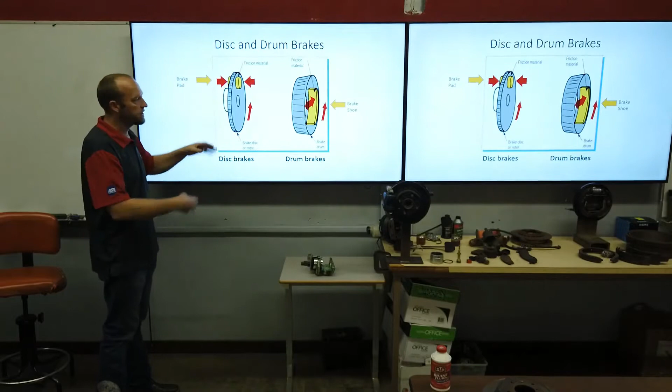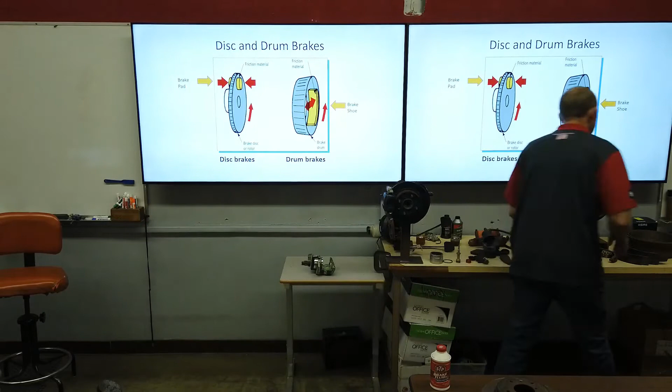With the disc brake, we have a brake rotor or brake disc, and the friction linings are called brake pads. With a drum brake assembly, we have a brake drum, and the friction lining is called a shoe. So here we have a brake drum and a shoe, and here a brake rotor or disc and a pad. They look completely different from each other.

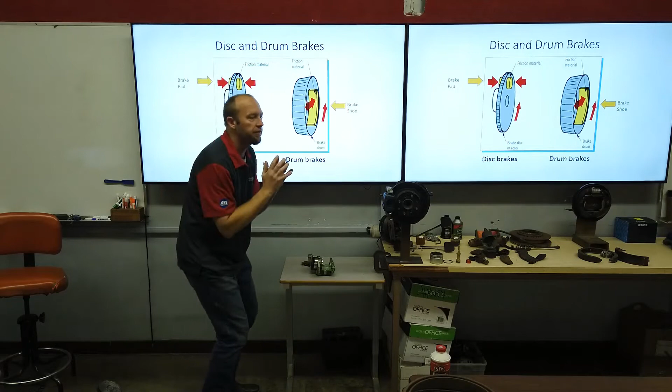I should say real quick, clamping force on a disc brake system: friction linings come from the outside in and clamp down to slow this brake disc, which stops the wheel. With a brake drum, they push from the inside out to make contact with the drum and slow the wheel down and ultimately stop the car.

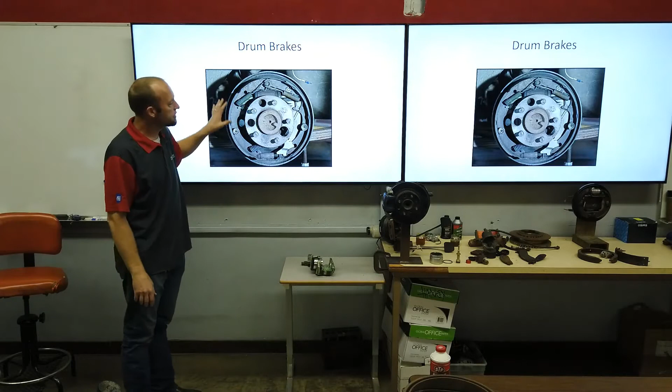This is a typical drum brake here where you see the friction linings of your brake shoes. A drum would be over the top of that, so you can't see any of this. So I want to look at a video here.

The video we're going to look at is a drum brake video, and I'll say about this video that I don't watch a lot of videos and I don't really endorse a bunch of videos. I'm realizing the irony of this as I'm shooting a video. In class, I typically don't play a lot of videos. I want to explain it the way I want you guys to understand it, so I don't usually grab a lot of videos from the internet. A lot of the reason is that there's a lot of misinformation, and there is even in this video, so I'll make a correction to that.

The main reason why I'll show this video is I'm trying to show something dynamic that you usually don't get to see. I want to make sure you understand how this would work on a car, because we don't usually get to see what happens inside the drum since it's not visible. So with this drum brake, and with disc brakes as well, I'm going to show a video here and I want you guys to see how it would operate and function.

One of the errors they make in this video is they call it a self-actuator. What they're referring to is a little self-adjuster that, as the brake shoe linings wear out, will self-adjust. Self-actuating is a different property of drum brakes. Self-actuating is the idea that as these brake shoes apply, the harder the drum tries to rotate, the more biting force those shoes have—they self-actuate in that regard. A self-adjuster is a completely different process: it adjusts as linings wear to keep proper clearance between the shoe and the drum.

So don't confuse those terms, but we'll go ahead and play this video. What I want you to pay particular attention to is the way the hydraulic fluid comes out and the pistons expand, and how one shoe will bite in, shift over, and apply the other—that's called servo action. We go from the shoes not applied to a nice perfect circle, and as they apply they egg-shape and bind up. That, combined with the self-energizing property and servo action where one shoe helps apply the other, is why a drum brake system generates a ton of friction without a lot of application force.

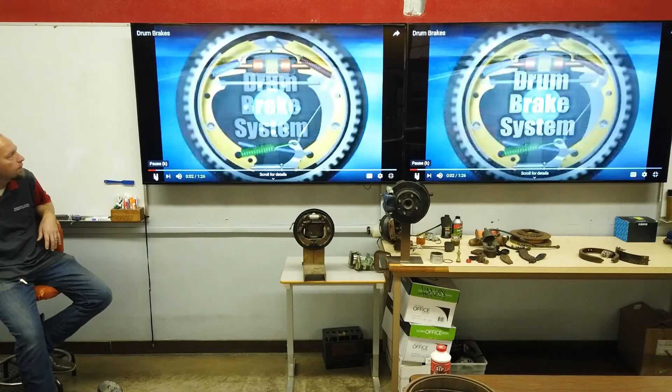In drum brakes, the wheel cylinder, with the aid of hydraulic pressure, forces brake shoes out against the drum to create friction. So pay special attention to the fact that as the wheel cylinder expands and applies, we get this shoe that will apply and bite in, and then it's going to kick over and apply this other shoe here. So that's some of the application. I'm going to let it play out after this, but I'll stop it here and make a couple of points.

This drum assembly is a servo style of drum. One of the ways that you'll know is that there's no anchor pin like we have on this one down below. There's an anchor down below that does not let this shoe apply the other. So this is a more modern drum brake assembly called non-servo. This is servo, what's displayed up here. Both of these drum brake systems have self-energizing properties, but this one has servo action and this one does not.

Because one shoe helps apply the other in this case, they generate a ton of friction and it can be uncontrollable, where you get a higher tendency of different amounts of friction from a different wheel, and you can have a car that starts to pull. If this one makes more friction over here than this one, then it will pull towards the side that makes more friction. So you tend to have pulling problems with systems like this because they just go to town and make friction. Well, if they don't make the same amount of friction, then you can have a car that starts to pull. They got away from using this style probably by the 80s, mid to late 80s.

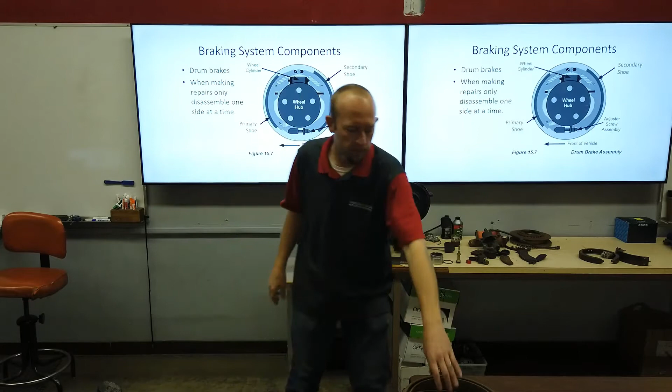One of the common problems with the drum brake system is that although it does have a self-adjuster, they usually don't self-adjust. So a really common issue with drum brakes is they come out of adjustment. Because it's not taught very much anymore, what you'll see a lot of techs do to adjust drum brakes is throw the drum up on the car, spin it, and bang on it to try to center the shoes. They spin it and bang on it, then pull it off and see how much it drags.

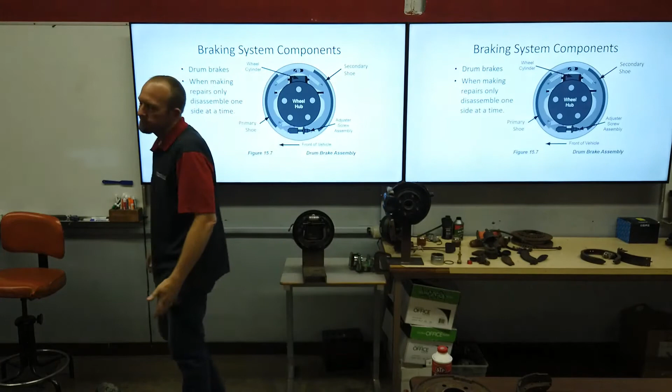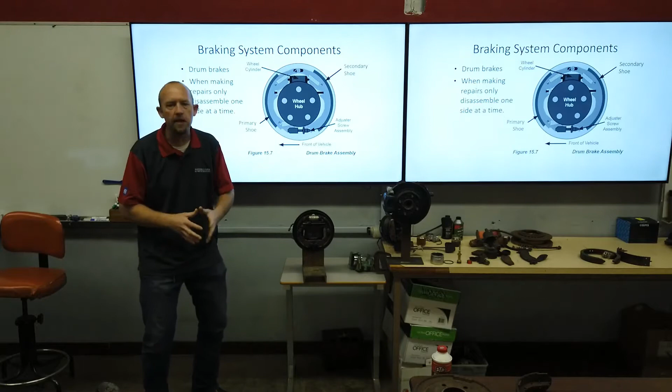If you deal with older techs in the industry, they know how to adjust drum brakes properly. Very few people take the time to do it. But where it is still done often is in medium and heavy duty applications, like semi truck and trailer. Some of you may have experience driving trucks like that and having to check slack adjusters and things.

But basically, the right way to do it is you end up adjusting the shoes all the way out until they make contact with the drum. Then you back them off the same amount. Now, that may mean that I go and click this adjuster out.

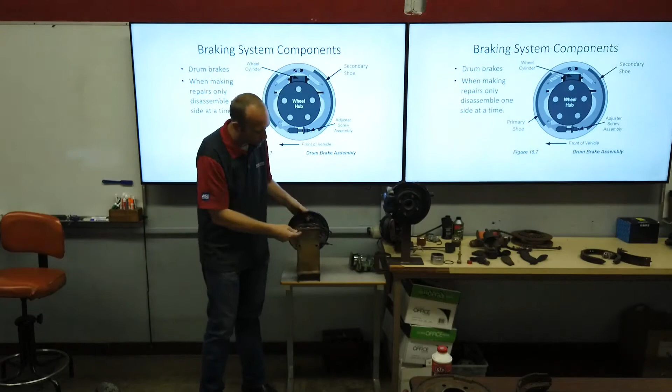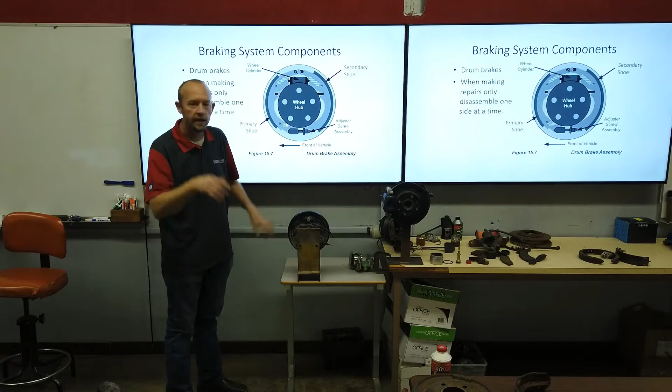There's an access hole through the back on the backing plate that I use with a brake spoon, which is kind of like a bent screwdriver or a pry bar, but slender. You can come back through and grab the little adjusting wheel on here. This is a little wheel right here that'll have a little cutout behind it. I can go and ratchet it, click, click, click, click, until it comes up and makes full contact and you can't turn the wheel anymore.

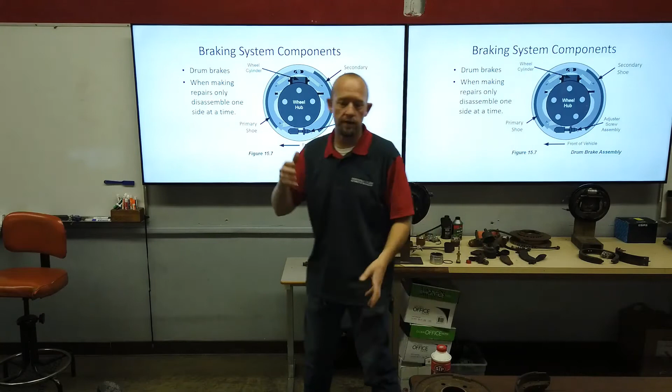Then you would come in and back it off the same amount. Maybe you adjust it all the way up and back it off 5 clicks. You do that for every single wheel, and now you have brakes that are adjusted identically.

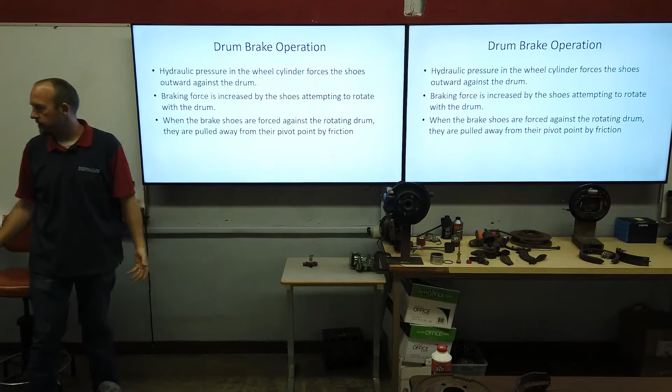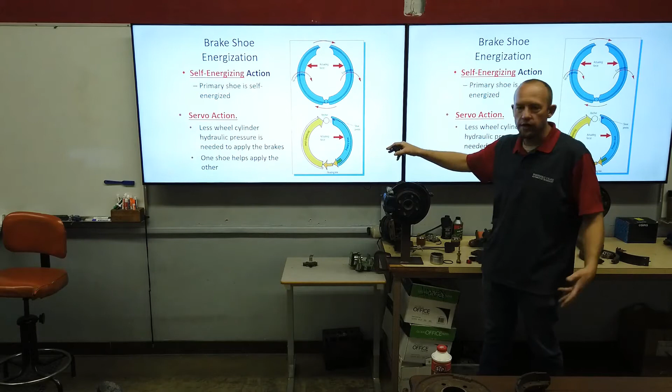Those are some properties we have, and I've addressed the non-servo style where the anchor is down at the bottom and they usually move the self-adjuster up top. So our self-adjusters often don't work.

Brakes come out of adjustment. When they come out of adjustment, because there's more clearance between the shoe and the drum, it takes more pedal travel before the shoe finally makes full contact and we can start building pressure. A common complaint from that would be a low pedal.

When a customer comes in complaining of a low brake pedal, the first thing I'll do is check the brake adjustment if it's got drum brakes, because 90% of the time, if you fix the adjustment, the pedal comes back up to the top. I've never had to mess with the emergency brake cable when people's e-brakes don't work - it's usually just a drum brake adjustment issue.

One tip-off that the brakes are out of adjustment is if you hit the emergency brake and it just zips with nothing happening - it doesn't apply the brakes. You can put it in gear and it just takes off right away, even with the brakes applied.

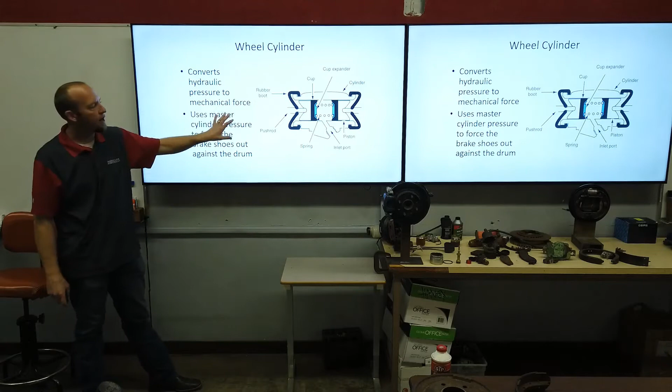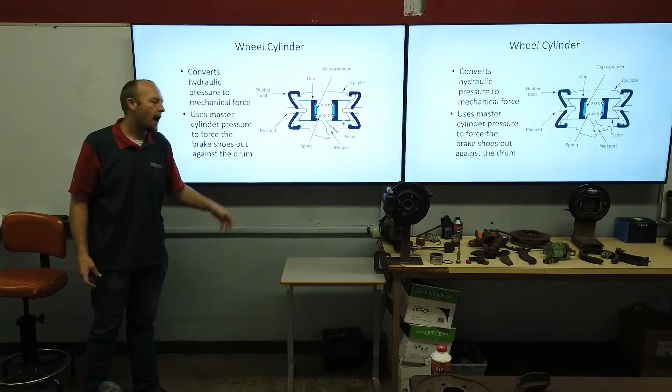Our wheel cylinder is going to be a hydraulic component for our drum brake assembly. The emergency brake - I'll talk about it - doesn't have to do with this, this is our hydraulic component.

I'm going to switch back to this slide. This over here is our emergency brake lever. It would be cable operated. A lot of manufacturers nowadays, for an emergency brake, you'll notice...

If they went to 4-wheel disc brakes, on the inside of this brake rotor - we call this a hat rotor because it just fits over the top of everything like a hat - there's a little drum area on the inside. A lot of manufacturers have started making an emergency brake shoe that fits inside that little area on their 4-wheel disc brakes. That's how they keep 4-wheel disc brakes while having an emergency brake that works a lot better than a typical disc brake emergency brake.

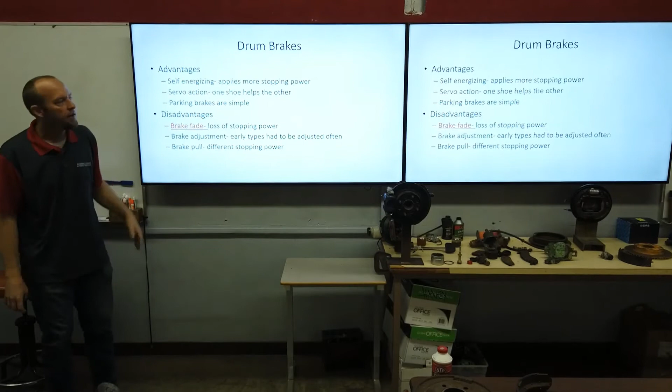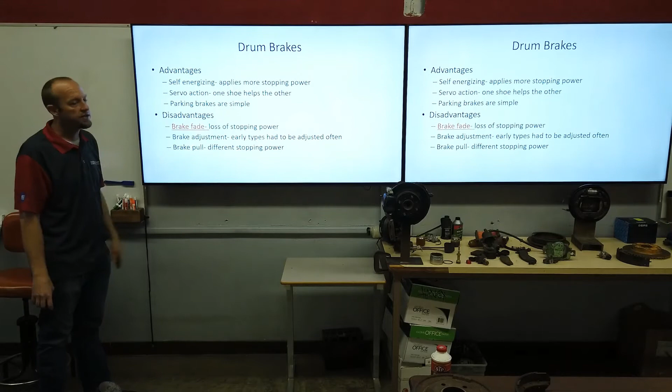There are advantages and disadvantages to everything. For a drum brake, the advantages are the self-energizing property and the servo action - park brakes are simple and work really well. The disadvantages are they're much more susceptible to brake fade; that big drum over everything traps heat like an oven. They require regular brake adjustment, and because their brakes come out of adjustment relatively easily, they're more susceptible to brake pull, where uneven amounts of friction are applied to each wheel.

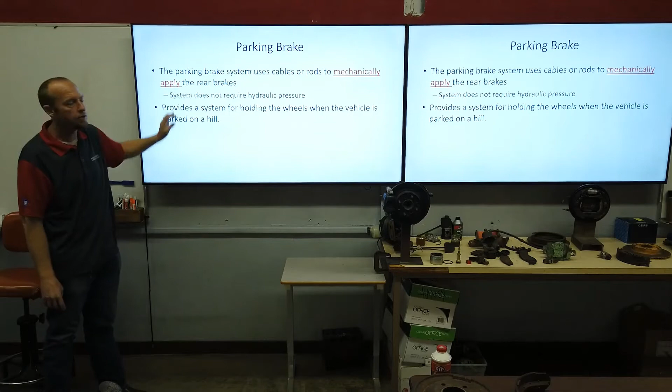The parking brake system has to be mechanical. The system does not typically require hydraulic pressure, so it has to be a separate system from the foundation or service brake. On cars, it's usually mechanical and provides a way of holding the wheels when in park.

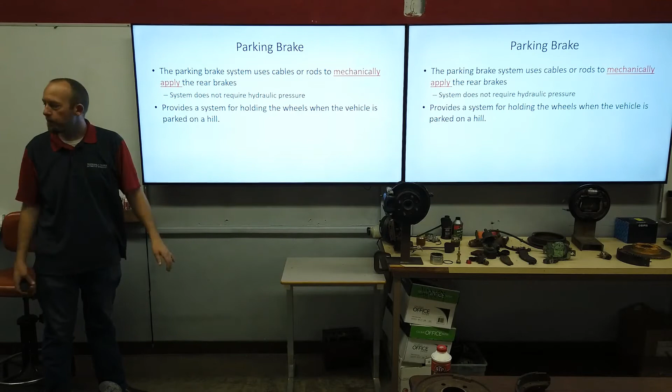So then we get to our disc brake system. A disc brake system will have our brake caliper. There's a variety of different ways - floating, sliding, and fixed calipers - which we'll talk about. And then you have your brake rotor or brake disc.

So the caliper, this way, the system has a rotor sandwiched between two friction linings, called pads. Then you've got a little square cut seal, a piston seal, which keeps fluid in, and also retracts the piston after brake application.

The line comes in, and the bleeder should always be at the top. If somebody installs a caliper upside down, the bleeder would be on the bottom, and they would not be able to get all the air out of their brakes.

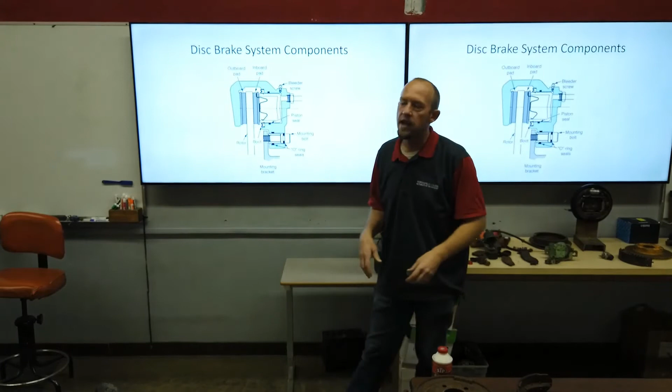I've had customers come in who knew enough to put brake calipers on their car, but installed the right caliper on the left side and the left one on the right side, so the bleeders were upside down and they couldn't get the air out of the system.

I saw it as soon as they drove up in the driveway and mentioned what was going on. I looked at it and thought, well, they're going to pay me for what I know. Because if I had told that guy right away, 'hey, you put your calipers on upside down, that's why you can't get the air out,' and if he was capable enough to put the calipers on, he could just switch them back and forth himself.

So I'm going to wait till he leaves, make my diagnosis, write it up, call them, and a lot of times once you have it, they'll pay you to fix it too. But it's not to my advantage to just tell them while it's in the driveway and let my money and time spent just drive out of the driveway.

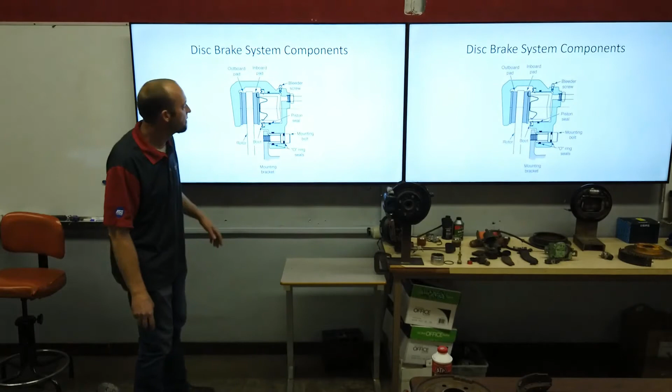So this is a floating pin, which is the fixture that mounts that caliper to your knuckle.

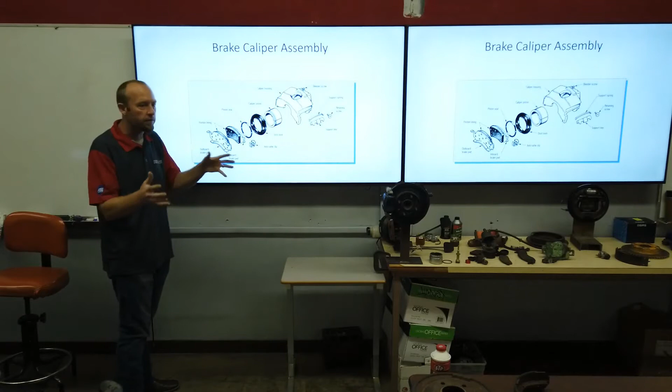This is an exploded view of a caliper, what we'd call an exploded view diagram. So here's the friction material, the pads. They often have some hardware to keep the pads from sliding around inside the caliper and making noise. There's our little square cut seal, a dust seal, the piston, and then the body of the caliper with the bleeder.

Got a couple of videos for you here, same as before. On this one, the biggest thing I want you to see is that this is a sliding caliper.

So on a floating caliper, that's what takes place: the pistons come out and apply the pad on one side, then the whole body of the caliper rakes over and pulls the other pad into application. The pistons move this way, and the caliper body slides on a pin and moves the other way. That's how that one works.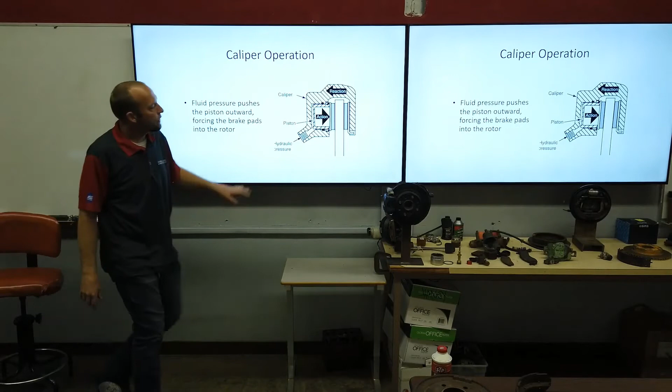So this is our floating caliper that would float on some guide pins. As the piston comes out and applies this pad, the body would rock over and pull this pad into contact to generate our friction to stop this vehicle. The square cut seal we're seeing would deform.

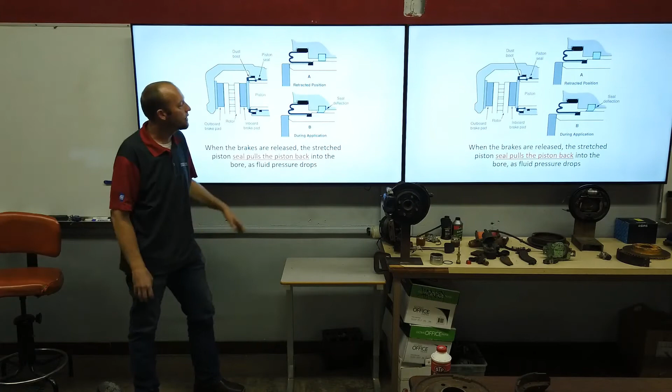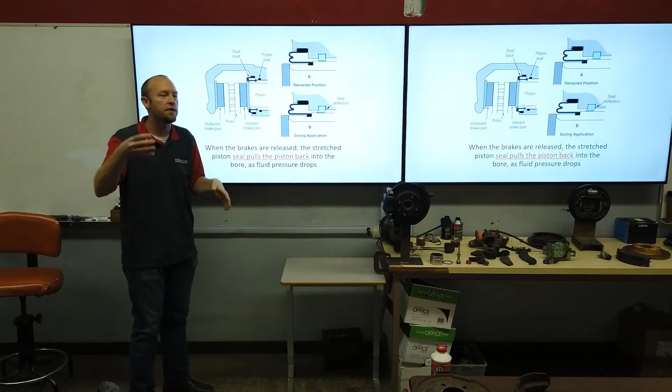So as the piston slides out to make contact and push the pad into contact with the rotor, then when brake pressure is released, it pulls the piston back. These become self-adjusting and self-cleaning because any dust that's generated gets blown away, where with a drum system it's trapped. They also self-adjust because as the friction lining wears off, the piston just slips out a little further past the seal and falls into a new range of deforming and retracting.

So pretty simple system here, doesn't require a ton of maintenance. Some advantages of disc brake systems would be that they're pretty much fade resistant because they're exposed to so much open air that they can get rid of heat quickly. So they're fade resistant, self-cooling, self-adjusting, and self-cleaning because the dust just blows away.

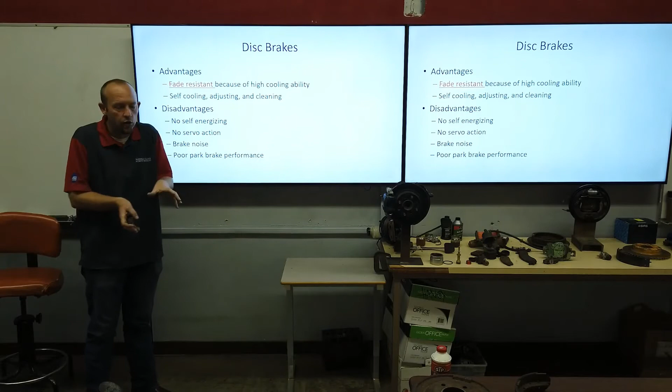Disadvantages: it requires a ton of application pressure, which is why the pistons are so much larger than those of drum brake systems. No servo action, no self-energizing. Because they generate so much friction, they generate a ton of heat. They usually become quite susceptible to brake squeaks, and have poor park brake performance, which is why a lot of them have moved to a system like I was showing you earlier, where they make a little mini drum inside the head of that rotor.

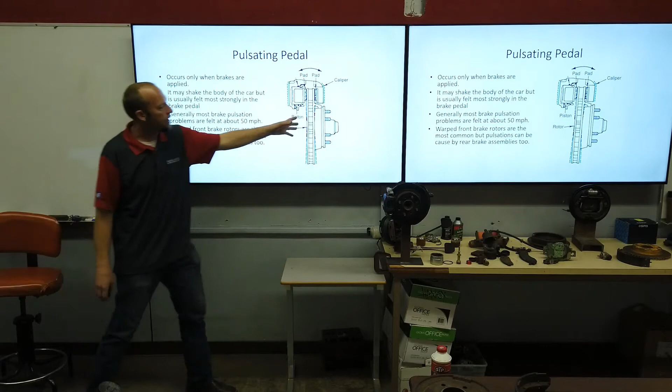So, brake system problems that are common to see: pulsating pedal, we've talked about warpage, where the rotor is not true. And because of hydraulics being what they are, if this rotor doesn't rotate true and it beats the piston back...

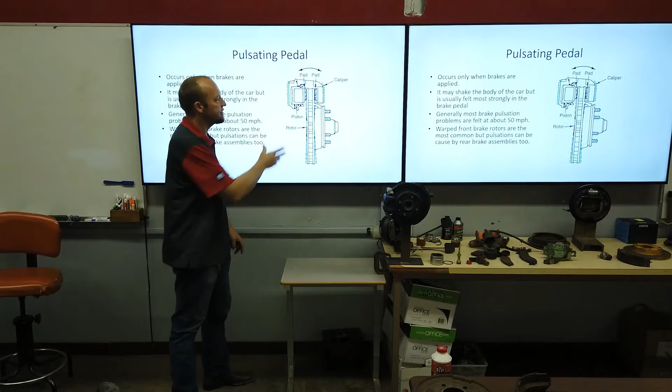...then as it pushes the piston back, the piston pushes the fluid back, which pushes the pedal up inside the car. And as it chases this thickness variation, you get a pedal that pulsates. The faster you go, the faster that pulsation is.

So typically what I would do to diagnose pedal pulsation is get a car up to about 50 miles per hour, and then lightly press the brake. If I feel the pedal come back and hit me in the foot, then I can tell that the brake rotors are warped.

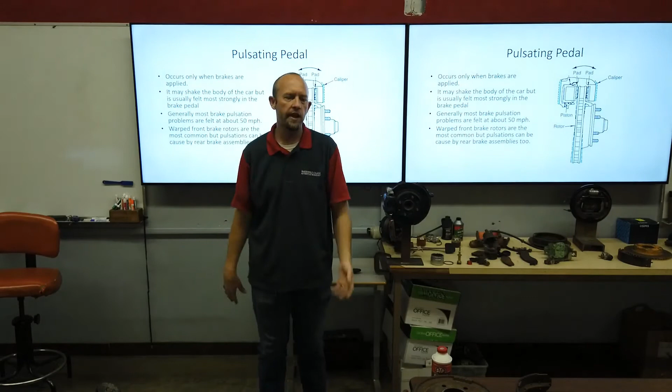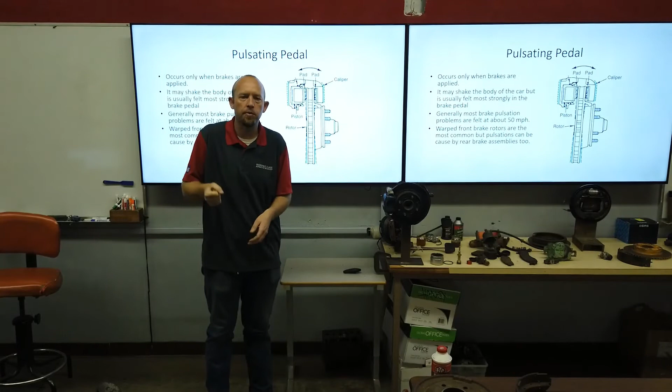The other way you can isolate rear from front is because the emergency brake is typically on the rear axle. If you use the emergency brake to apply the brakes on a drum brake system, you can feel it in the emergency brake and apply the drums. That's also very useful for noises.

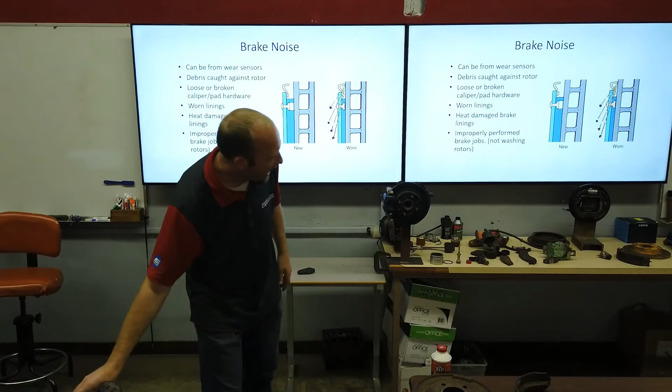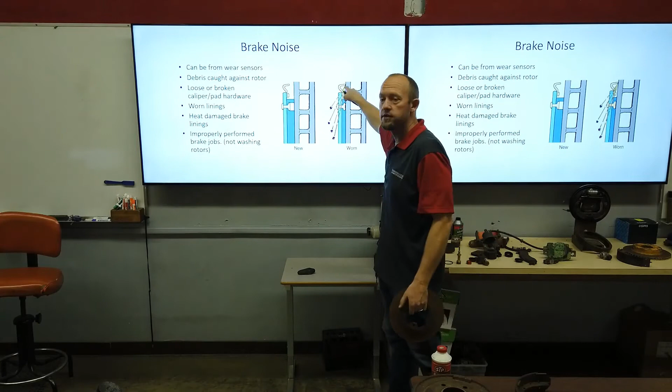So when you hear brake noises, a lot of brake pads will have these little tattletales or warning indicators on these pads. You can see it on this one that would have a warning indicator there. And if people ignore that long enough, instead of just the squeak, usually they'll squeak a little more when the brakes are not applied, but it will sit there and drag, and then when you apply the brakes, it'll go away momentarily.

But if they ignore that squeaking noise, then it turns into this, which is what grinding money sounds like, as I was telling you before. That is not like nails on a chalkboard. That is money. So the price just goes up.

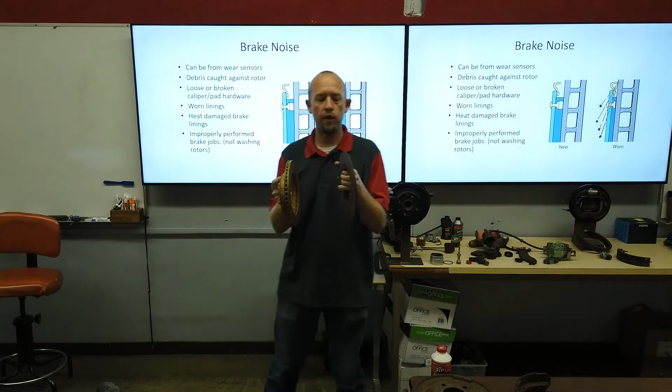By the way, this rotor used to look like this one. You can see how thin that one is. You can see the little slots and ribs inside this one. That whole side of this rotor is gone.

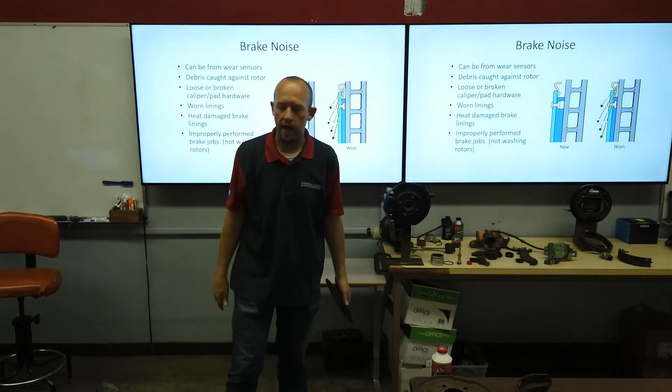And so that person drove it until the pistons popped out of their calipers, which some people will do. And if they do that, do not let them drive that car out of your shop. They can tow it. They can tow it themselves. They can call a tow truck. They can tow it.

They cannot drive it. That is a huge liability, and they may go right down the street and kill somebody else's family member or something. Do not let them drive it out. I've had people say, well, you can't stop me from taking my car, I'll call the police. I'm like, go ahead. If they'll pull you over and give you a fix-it ticket for a taillight burned out, what do you think they'll do if you can't stop your car? So don't feel like a jerk, it's doing the right thing. Protect the people in your community.

That's the right thing to do, in my opinion. I'm not making them pay me to fix it. I'm just telling them you can't drive a car that you can't stop.

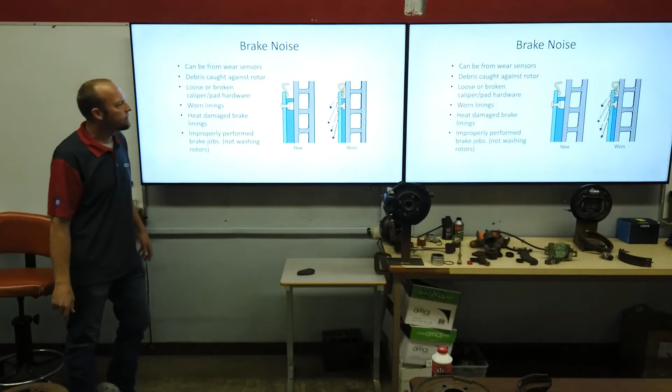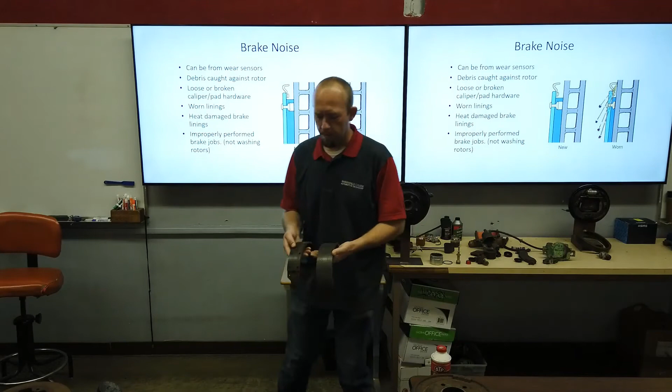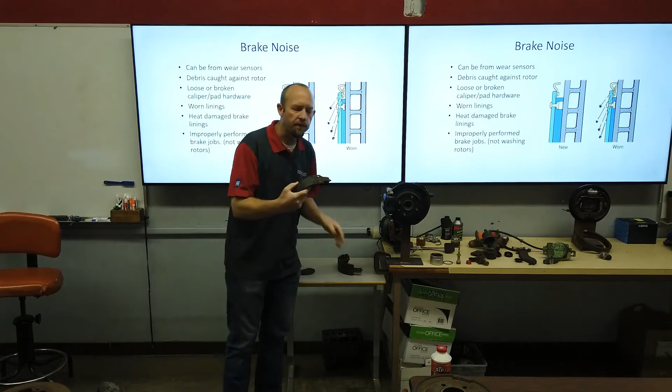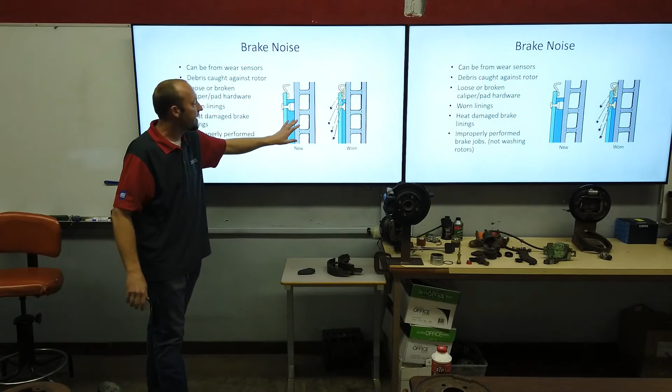One of the other things to be aware of: you can see this is a riveted pad. I've got a couple of brake shoes that show this well. This one is a bonded one, you can see there's no rivets, it's glued on. This one is riveted. I want you to see the linings on this are about the same, but the one with rivets will touch before we have all the lining worn out. On one that's glued on, it will go all the way to the backing plate, or all the way to the frame of the shoe - the metal part. Where on this one, before it even wears all the thickness of lining off, it's going to touch a rivet. So be careful - riveted pads may look like they have more material than what they actually do. We only have as much friction lining as to the point that we can touch the rivet.

Some of the squeaks that we get are from somebody doing a brake job and not washing the rotors like we talked about. Other times you take them apart and you see that.

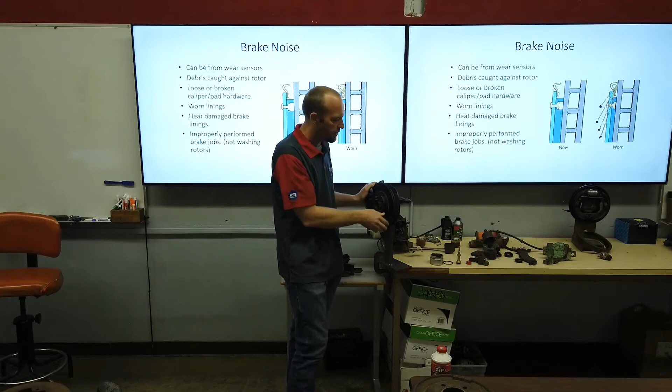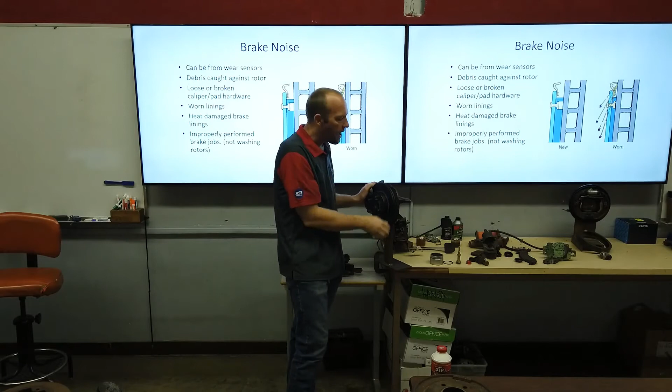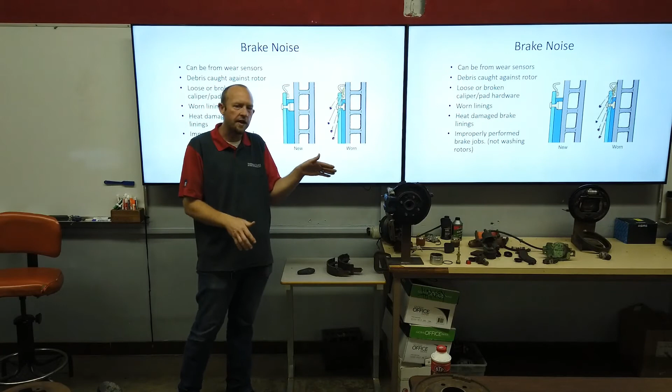Other times, one of the things you got to watch out for as well - you can hear this one. What's taking place on the back side of this, if I turn it a bit where you can see, there's a backing plate here that keeps rocks from getting in, or water from splashing directly on this. A really common thing that happens that people aren't paying attention to is this thin sheet metal backing plate will get bent to where it touches the rotor. Make sure you always look down, make sure it's clearanced out, and if it is touching, just bend it back, bend it out of the way so it can't touch anymore. Sometimes your backing plate will start to rub up against the rotor and it'll squeak - really common entry-level tech mistake. So make sure on the brake jobs you do that you look down the side of that rotor and make sure the backing plate, or that splash shield, dust shield, is not touching the face of that rotor. You'll end up with a squeak.

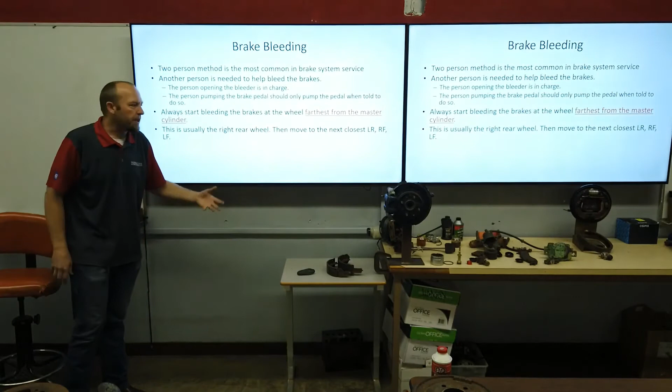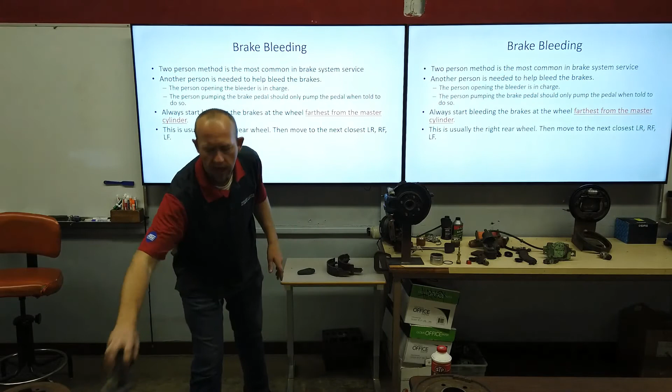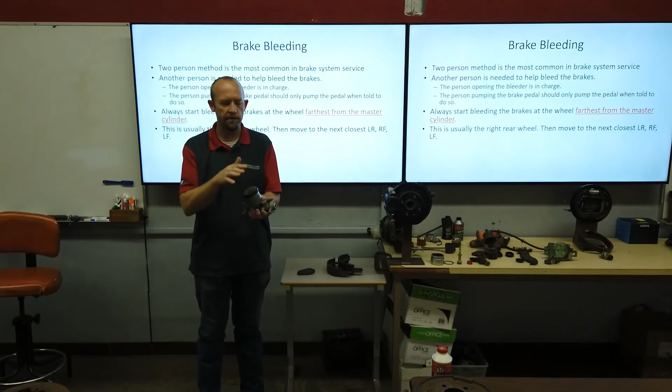Brake bleeding - we talked about our two-person method. There's also power brake bleeders where you hook air up to it, and there's a special adapter for each master cylinder. A lot of dealers will have those. In some independent shops we have one, but because it requires a special adapter for every master cylinder cap, and all the different caps they have, you're typically limited on what you can use it on, and it can make a big mess if you get it installed on one that does leak. And if you spray brake fluid and get it on somebody's paint, it'll orange peel their paint like bam. So make sure you're super careful with brake fluid - we don't drip it on people's paint and stuff like that. But brake bleeders are super nice, a one-person method - you hook up a line with a special cap adapter, then you just go to each wheel and crack them, and you can bleed brakes like that with a system like that.

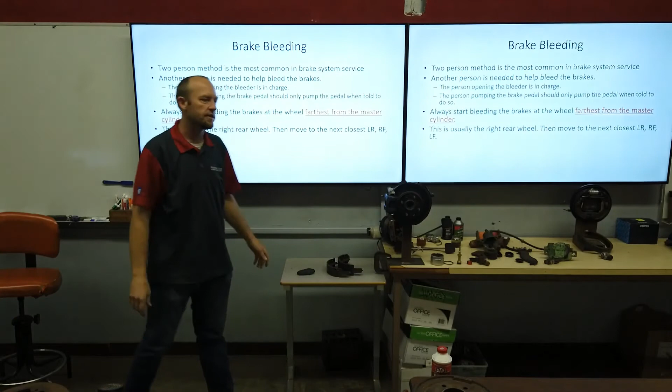When you are doing a two-person method, then you start with the one furthest from the master cylinder.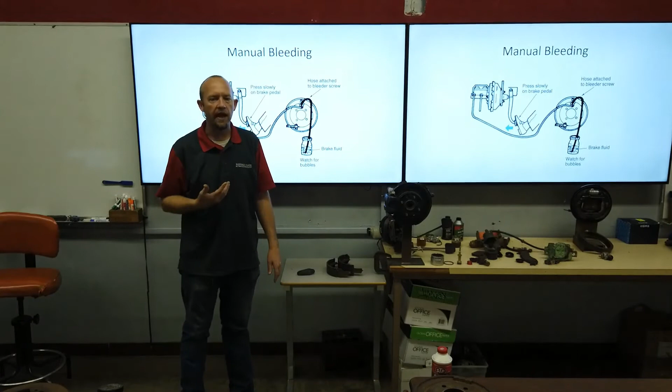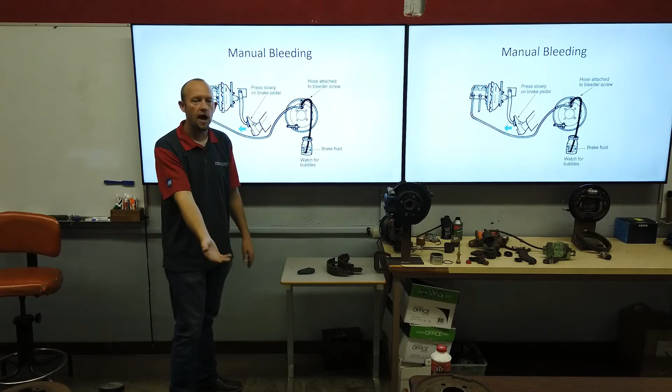This is another example of a one-person method. When you do this setup, you get a line, open the bleeder, run a line down, and fill up a jug with brake fluid. Every time you apply the brake, it pushes fluid out, and when you release it, it sucks back in. If this is hanging out in the air, you suck air back into the system. But if it's hanging into a can of brake fluid, the bubbles float up to the top, and every time you release the pedal, it just sucks brake fluid back in. So it's a way to do brake bleeding with a one-person method.

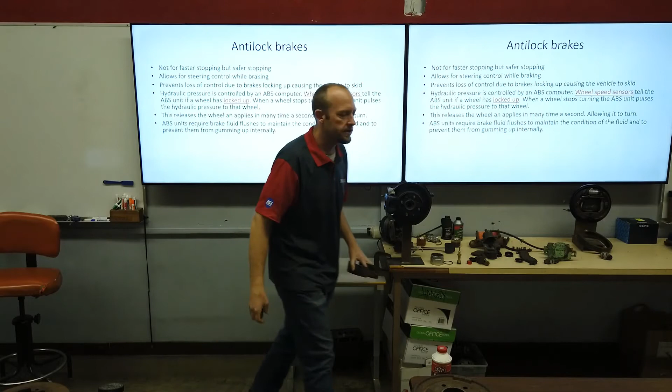I want to talk a little bit about anti-lock brakes, and we'll wrap this up here. With anti-lock brakes, we've got a wheel assembly with a wheel speed sensor tracking all four wheels. Our anti-lock brake system has a module that is watching all of the wheel speeds.

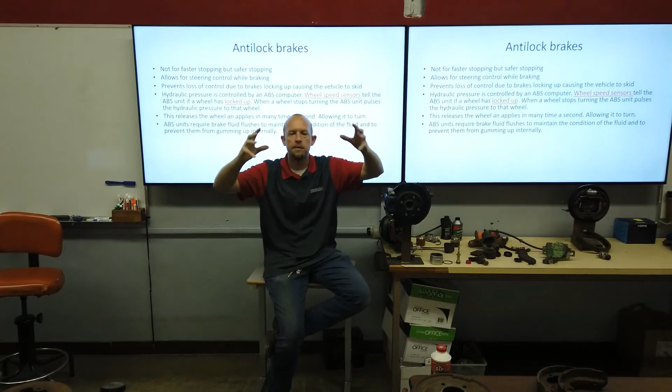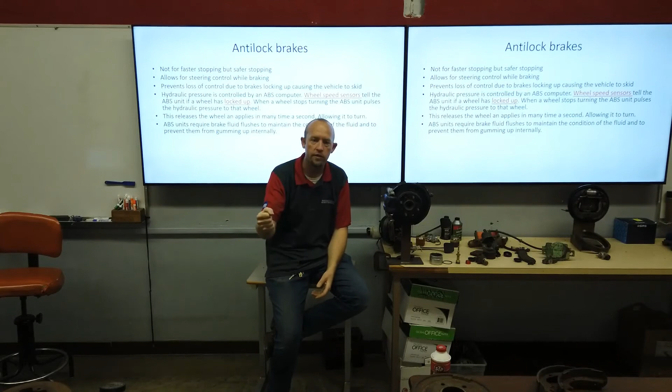When the brakes are applied, the system becomes active. So it's considered passive—it's just watching wheel speeds when the brakes are not applied. But once you apply the brakes, the system goes active and starts watching the wheels. If we were going 60 miles per hour, it's watching them as you apply the brakes: 59, 58, 57. If you have three wheels that start counting down—56, 55—and one of them goes to zero wheel speed, it knows that wheel locked up. Because you were applying the brakes, it knows the brakes are in play, and when it sees a wheel go to zero, it knows it locked up.

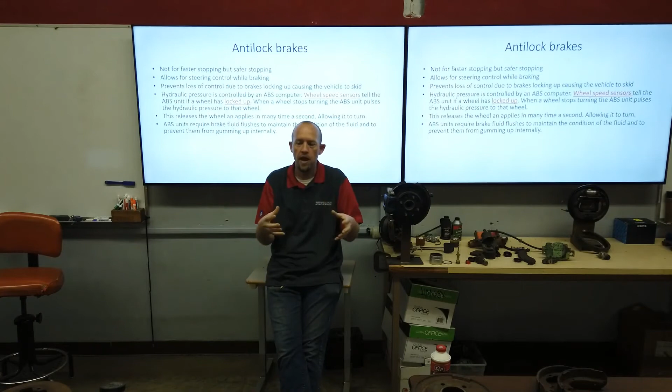Now, what it will do is use a modulator assembly that can control brake application to each wheel and a pump motor. It will bleed off the brake pressure to that wheel so it can start turning again, and then reapply it. It can do that over 10 times a second, so it's very quick.

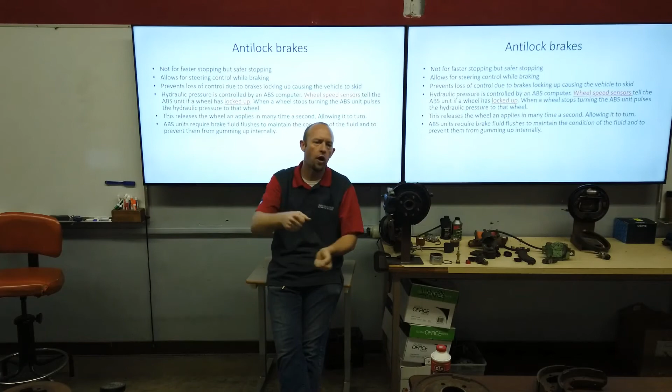What an ABS system does is, once we've had a wheel lock up, or if all the wheels lock up, we start to skid in the direction of our momentum. With ABS, it doesn't necessarily shorten the stopping distance, but while your wheels are locked up and you're in a skid, you cannot control the vehicle. If we can keep our wheels in contact with traction with the ground, we can maneuver the car and avoid accidents while braking. Where if a brake assembly were to lock up, we would just start to skid. So it's a way to maintain control of the vehicle and traction with the ground during braking, and have the potential to avoid an accident.

If we were in a skid without an ABS system, you should release the brakes so the wheels can start rolling again. Once you get traction again, you can reapply. Before the days of ABS, everybody knew how to do that. But now with ABS, you don't even have to think about it.

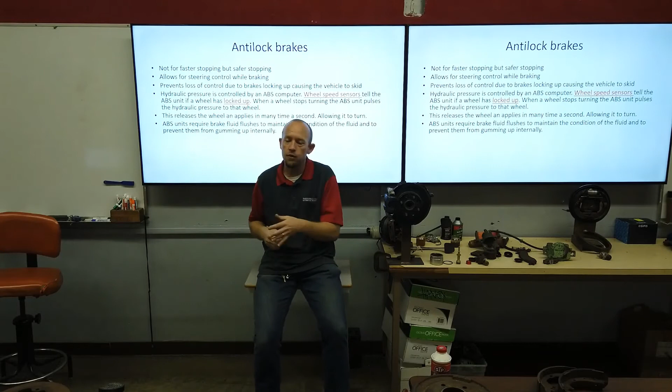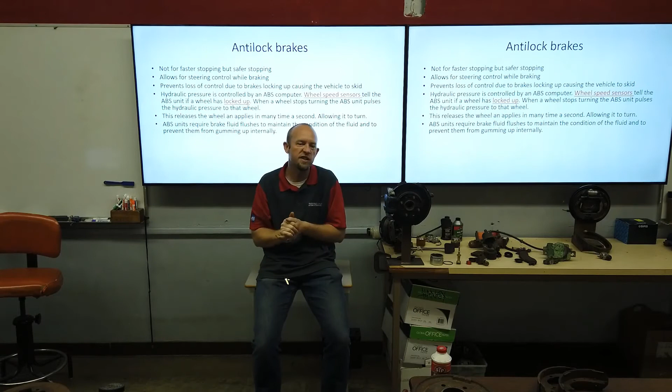It might freak you out if you've never been in an ABS stop. If you apply your brakes hard enough, you'll actually feel the pedal kind of pulse, and you'll hear your pump motor kick on with a buzzing sound, and feel the pedal pump up and pump down. You just stay in it, and it goes into an ABS mode where it applies the brakes for you, keeping them from locking up into a skid.

So that's our last slide here. We'll follow this with a brake inspection lab where you go through and do a brake inspection. Before you ever do any brake work, you should always do a brake inspection, because we need to know: are the brake rotors within a service limit where we can machine them, or do they need to be replaced? What other kind of issues are there—is there a hardware problem? Try to understand the condition of a customer's brake system so you can put together a proper estimate. Is there enough material left on that rotor to machine it?

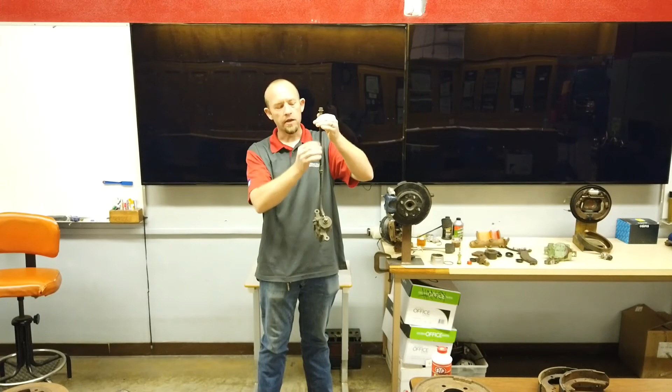Do we see any other issues? Some of the issues that we watch out for that I haven't addressed are things like brake lines. They have ribs down these lines so that when the brake caliper is installed, I can tell whether that brake line is twisted. On a longer line like this, it's pretty easy to see, and if I follow the rib lines all the way down, I can see there's no twist in it. But you can see how a customer could get it back mounted with a kink in it, and if you pull it tight enough, it'll pull that kink back straight. So I always watch for that in my brake inspections, making sure there's no twist in the line.

Make sure there's no leaks, that's part of it. Then we look and measure our friction lining, how much we have left. Look at our rotors and make sure what condition they're in. Are they warped? Are they not parallel? Do you see any hot spots in them?

If you see discoloring of the rotor, where this one does not have it, but you'd see blue spots - when we get metal real hot, it'll turn blue. If you see blue spots in it, you can't machine it, it gets replaced. If there's cracks or splits in this, it gets replaced. If it's too thin, it gets replaced.

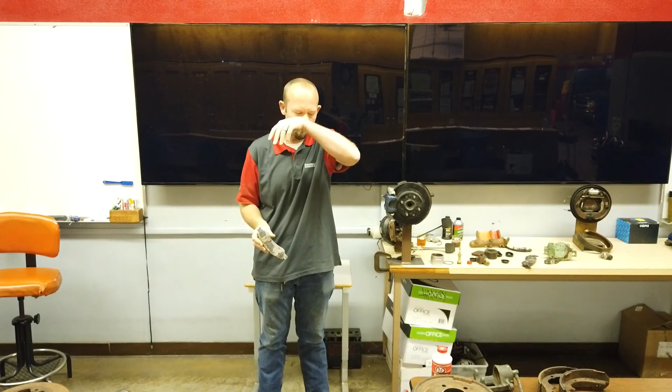The other one I'm a big fan of, which tends to be harder to get nowadays, is called Wagner Thermal Quiet. It's a really great pad in my opinion because they don't squeak. One of the differences is if you look at the back of the lining—the backing plate—they push some of the friction lining material through to the back, so there's no metal-to-metal contact on the back side, which eliminates a common place for squeaks. The downside to Thermal Quiet is they tend to make a ton of brake dust. They don't squeak, but they make a lot of dust. Still, they're a good quality aftermarket pad that I'd hold in high regard.

Any quality pad in the aftermarket will tend to have chamfered edges. I don't have one up here to show you, but where the pad comes out at a certain thickness, they'd chamfer off the edges so the tips or ends are angled down, which helps reduce the feather edging that can start to squeak. This one you can see doesn't have any of that—it's perfectly square. If this was angled at like 45 degrees up here at the tip, we'd say it has a chamfered edge. That's generally what you get from a quality pad, and they usually come with new hardware and things like that.

Thermal Quiets is a good one. You can never go wrong with pads from the dealer. Good enough.